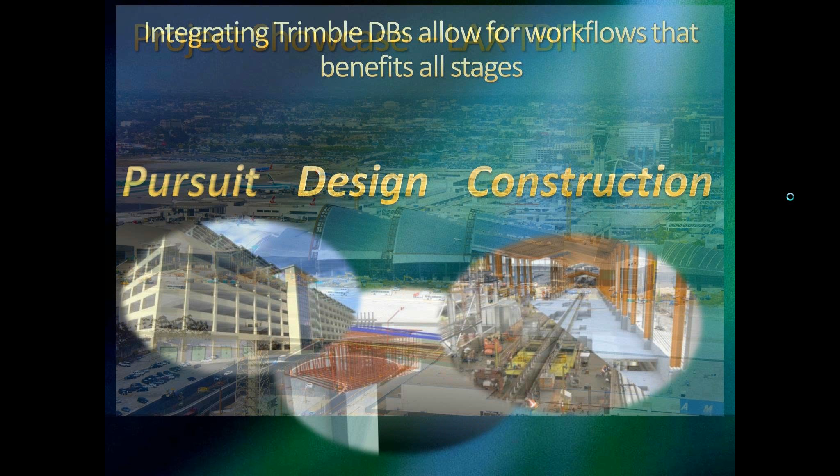So design, pursuit, design, and construction. We'll start off with the showcase project. This is the Los Angeles International Airport, and what you're looking at is the new Tom Bradley International Terminal.

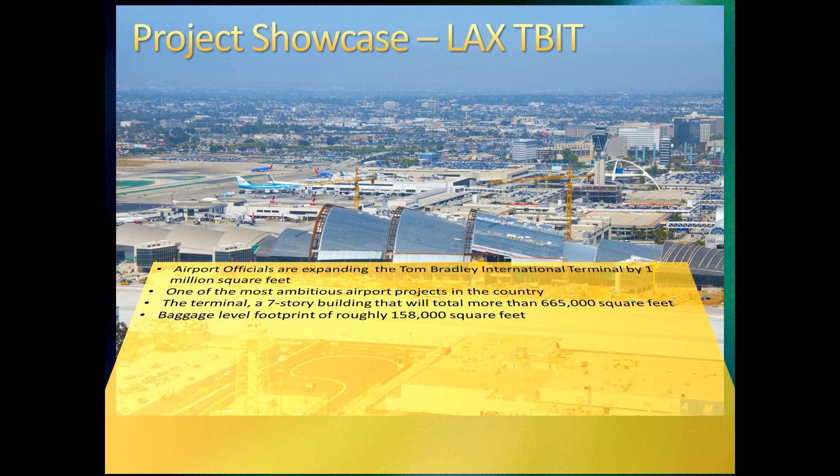Some statistics on the project: airport officials are expanding the Bradley by 1 million square feet. It's one of the most ambitious airport projects in the country. The terminal is a 7-story building with more than 665,000 square feet. It has a baggage level footprint of roughly 158,000 square feet. Architectural concrete towers nearly 90 feet tall, with 14 new airline gates capable of handling the next super jumbo jets, the Airbus 380 and the Boeing 787 Dreamliner.

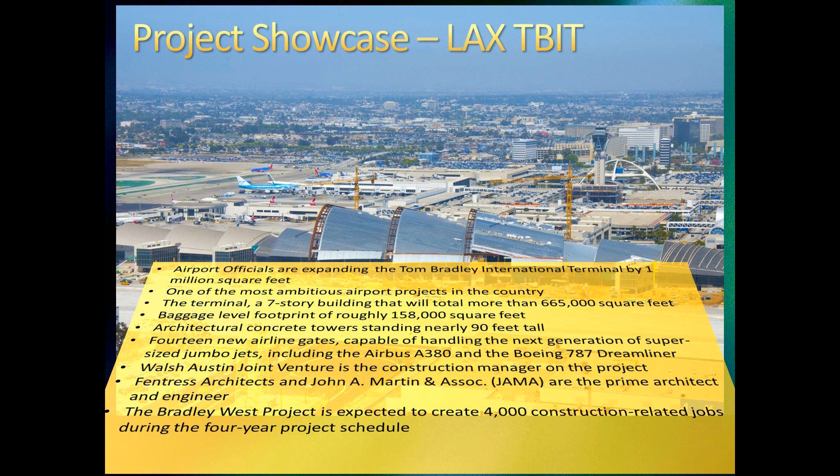Walsh Austin Joint Venture is the construction manager. Fentress Architects and John A. Martin are the prime architect and engineer. The project's expected to create at least 4,000 construction-related jobs during its 4-year project schedule, and I can tell you, I've been on site, and there's been over 900 craftsmen on site daily. Klorman, among other things, is the prime structural concrete contractor and one of the project BIM leaders.

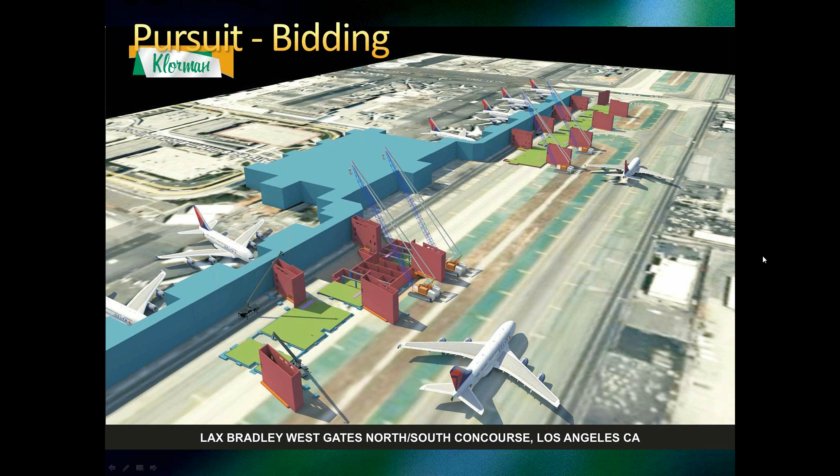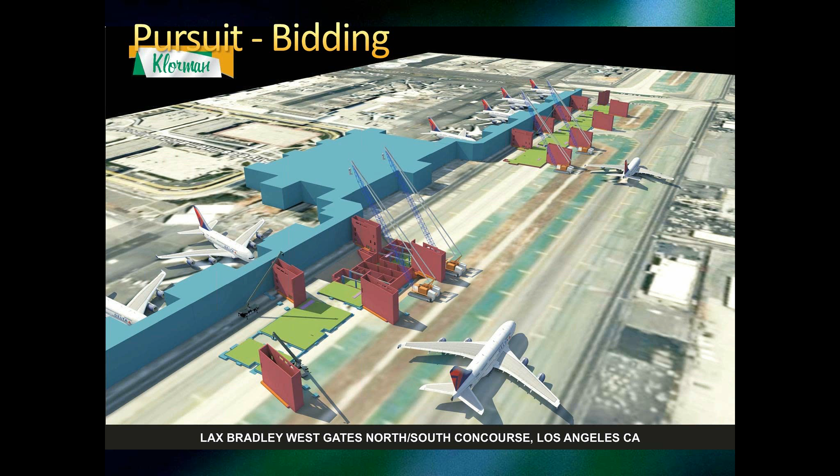So let's start off in the pursuit of the bidding phase of the project. When we found out about the project, we made a conscious decision that we're going to go after it. There were 8 other bidders for the concrete scope, and everybody was pre-qualified. The good news for us is that the competition was very capable of doing the project. The bad news for us is that the competition was very capable of doing the project, and it meant for us to be successful in a competitive bid process, we really needed to understand the building from the very get-go and look at all the opportunities we could find with our collective experience to take advantage and be the low bid on this project.

As you zoom in on this initial model, you can see we've got the existing Bradley modeled in. In this screenshot we're looking at logistics capabilities, where cranes are going to set, what relationships we have to existing structures, where we are on the runway, how close planes will eventually be crossing or nearing the construction activities. It gave us the ability to really start thinking about what we're going to do.

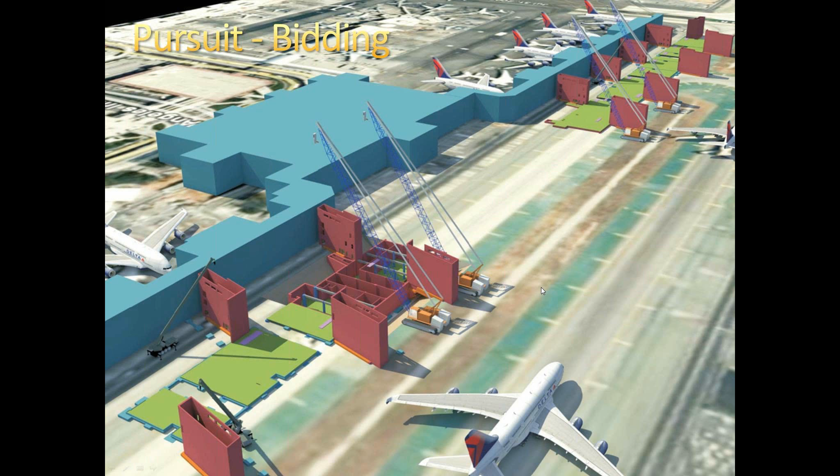Another advantage of the Tekla model is that we build on it and it increases the intelligence. Now these gates and these towers are architectural elements, so for us to really understand what's going on, we just increase the intelligence of the model.

You can see here we know all of the reveals or rustication strips to within a 64th of an inch. Our through-bolt tie layouts are already in, and the transfer of our panel layout is shown on the model. Here's something you don't see very often, but we do as a standard: all of our formwork to build these buildings is added into our model. So the intelligence of the model gets greater and greater and greater.

Now, it's not just the fact that we have this geometry or this representation of what we're looking at, but we're able to extract this information.

Because, for example, in our formwork we've modeled it into the building, we now, at the bidding phase, can extract exactly what it's going to take. Not only just a representation or part marks, but you can see here we actually have the bill of materials of what it's going to take at bid time, to know exactly what our costs are going to be and what our productivity rates can be.

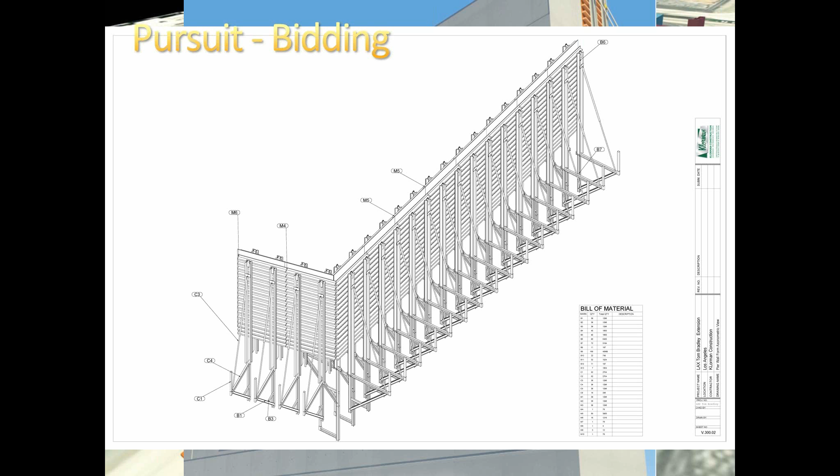It also gives us the ability to check our inventory, to see if that's something we're going to be able to provide out of our yard, if it's something we're going to need to rent, or if it's something we're going to use as an incentive to get the project. But again, all of this information -- when you're bidding projects of this size, you don't have months and months to study it. You have a couple weeks to put this project together and not make mistakes.

Another nice advantage of our approach with Trimble Technologies is that not only do we have the model in Tekla, but now we go into Vico Office and we're able to bring that model in. You can see here we have the model in the viewport, but we're now going into cost planning, and this is our cost planner module.

To some of you it may look just like an estimate. It actually is an estimate, but we use it for multiple purposes. One of the first things we use it for is construction caliber takeoffs. This gives us the ability to not only know gross areas, but to really understand the building in a location-based management.

You don't come out and build the building in one full piece. We know that horizontally we're going to divide the building into casting areas, and vertically we're going to divide the building into areas. So using Vico and the location-based management structure, it allows us to develop our cost plan based on that.

It also allows us to look at our various consumption rates, what formulas we want to use for our data quantity or our source quantities. If we're looking at hourly or lineal foot units of measure, we can roll everything up to look at common denominators.

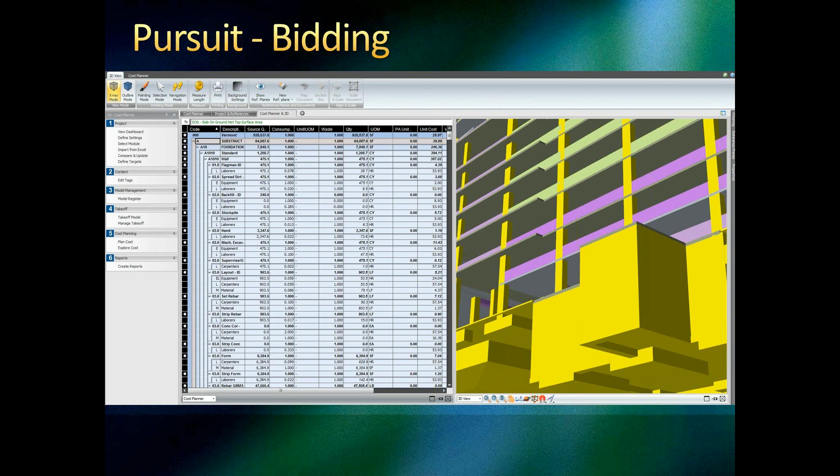Because again, at the bid phase, we're trying to look at all the different attributes from different angles, so that somebody on the team is going to spot something and say, wait a minute, looking at that from a lineal foot, or a cubic yard, or a man hour, it doesn't make sense, I think we can do better. And of course, that becomes the art of the estimate. It's not so much just the quantity survey, the mechanical approach, but that visceral, gut approach that the team really needs to be able to put together and draw from all of its resources.

Another advantage the Vico process gives us is what's called a flow line or line-of-balance schedule. Because we built the model in Tekla, brought it into Vico Office, and worked in our cost planning, our consumption rates and man hours are in there. We're now able to look at the project in a very unique fashion that lets us look for things.

For example, here, inefficiencies -- we'd like to see the lines in the schedule as close to vertical as can be done, and stacking. When we see big gaps, we already know that there's got to be some inefficiencies here. Maybe this crew needs to go faster, maybe these crews are going too fast.

Looks like we may have some interruption. When we drill down and look at this a little bit further, we actually find out that this task activity is rebar, and these are formwork lines - we want the start of formwork, rebar comes in, and the finishing of formwork. So it works out okay, but it allows us to really analyze what we want to do to make sure we can deliver the project predictably and controllably, but that we're not wasting money by letting the job extend too long - we'd incur additional general conditions for no reason.

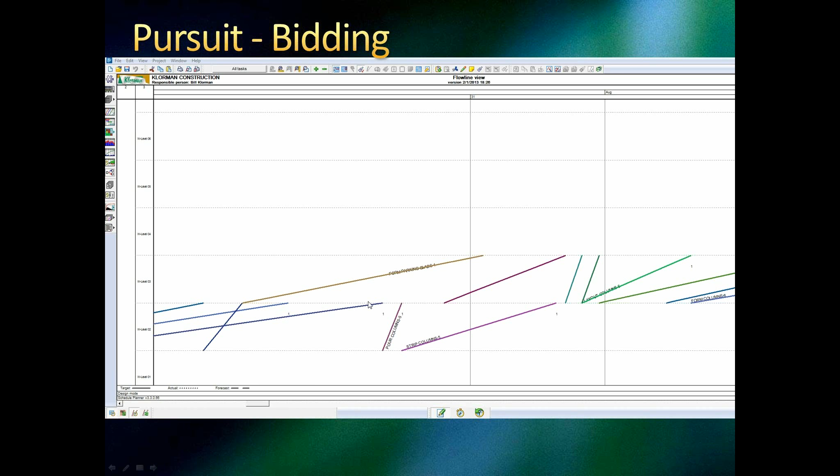It should make us uncompetitive. So another thing that we brought in from Trimble right away at the bid phase was Prolog Manager.

One of the things this project had was a very extensive good faith effort that had to be demonstrated with the bid, that we not only followed the procedures of good faith, but actually went out and did at minimum what was required and documented what we did in even greater fashion. So by using Prolog as our project management tool, we knew we could not only document it, but could show our ability for transparency during the bid phase and our ability to manage complex projects and tasks and report back on them consistently.

So by bringing in Tekla modeling, Vico Office, and Prolog Manager during the bid stage, we were actually determined to be the responsible low bidder, and we were awarded the project. That was quite a feat for us, especially considering the pre-qualified competition we were up against.

So now let's go ahead and move from the bidding phase into the construction phase, or building the project. Because we already started in the bidding phase with all of our technologies being brought in at different levels, we now just jump straight back into Prolog Manager as our project management solution. It's already started to be populated with the project through the bidding phase.

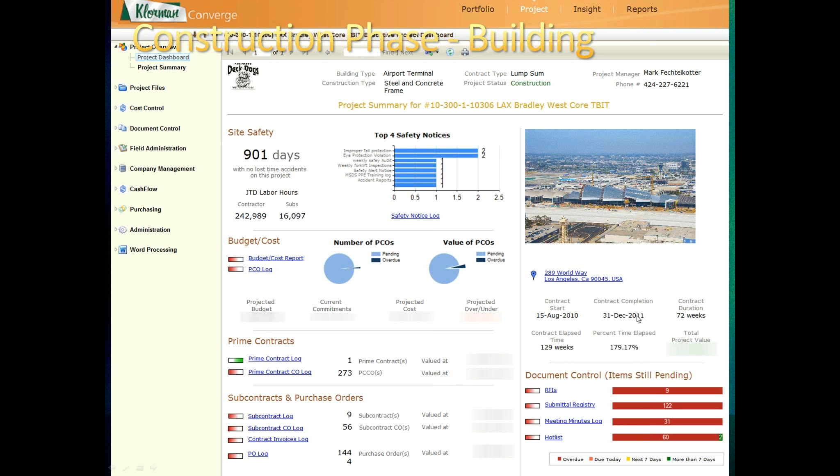In fact, I think we have north of 900 potential change orders submitted on the project. But great dashboard for me to be able to go in and look at what's going on in the project. And then, of course, I can drill down on everything.

Not only were we able to take advantage of internet-based solutions from a tablet or a computer, but now we were able to come in and look at an iPad solution. What you're looking at here is one of our superintendent's tablets or iPads, and I think this is a second generation. You can see what we have here is all the various checklists, daily details, work journals, events, the different group headings that they can drill into while they're on the site.

Now, what's so important to this, to our company, is this allows us to break the hold of an island. We look at the corporate office or the field office or a trailer as an island. And the problem with islands is when people are in an island, they're detached, right? Obviously, they don't see what's going on in the job. They don't have the ability to understand things in real time, current. They've got to wait for things to pop up or be reported to them.

So by fitting our superintendents and PEs and project managers with the iPad solution, we've statistically proven that we keep people out about 35% more time on the job site than they would have been without that. And that's just about 3 hours more of their day now spent walking the job, being involved in decisions real time, as opposed to being stuck in an island and detached from the action.

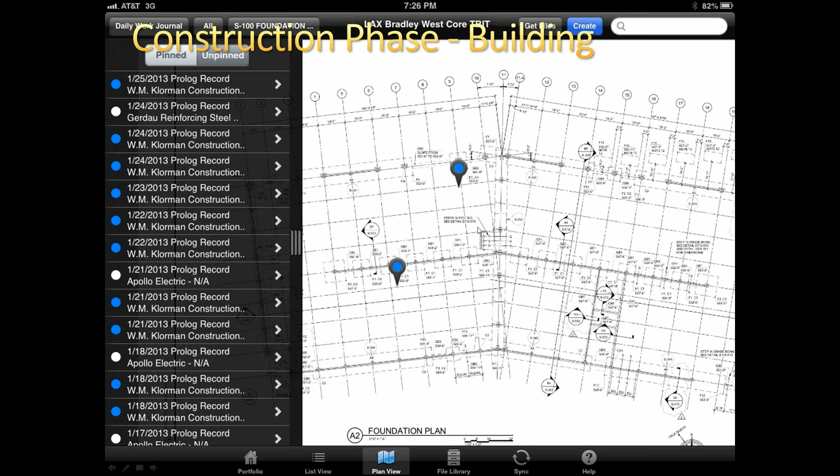So moving a little bit farther forward, not only can we look at this in a list view, which you're looking at here, but we can go ahead and look at it in a plan view. Now this is very powerful as you're walking through the job to be able to look at something that's happened, find it on the job site, on the plan, and understand what it is that took place, where it was, and this information works both ways. It uploads and anybody else can see it. It's not limited to just one user.

But we can now go into the cost planner. We can look at variances. We're able to look at productivity rates, where things have changed, where we thought maybe we could do something at, say, a 0.013 consumption rate, and they actually ended up changing to a greater rate. We have all of that information to be able to go back, not only analyze where we've come from, but where we're going to and what impacts that's going to have in the project towards completion.

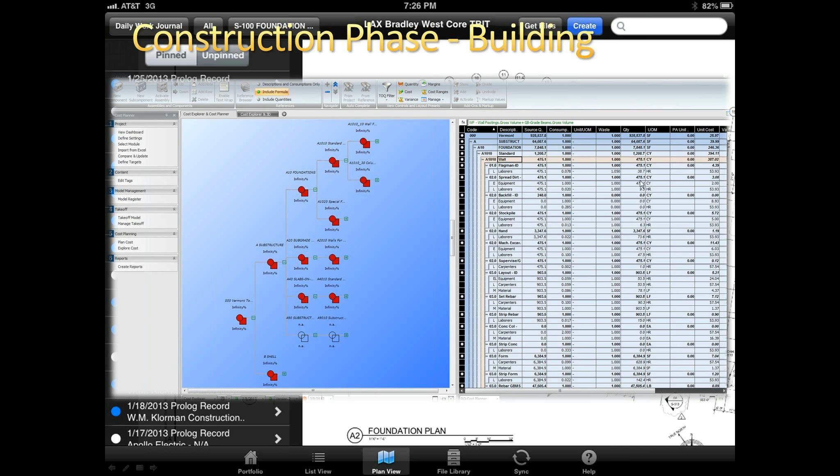Another very important tool is leveraging integration between dissimilar databases. What you're looking at here is the Tekla model in the background, and here you're looking at our workflow manager that takes information from the BIM and imports it directly into our project management software.

Here we're dealing with RFIs, and this particular RFI 151, what we've been able to establish is when we make a change in the model—and I should back up and tell you that we use the model as our central repository. Everything that happens in the project is recorded in the model, whether it's a bulletin or an RFI. We have hyperlinks to specifications, to PDF files that have photographs, statistical information, mix designs, testing reports—all of the data, repairs, anything that's happened, surface finishes, all of that information is captured in our model.

And then from the model, we're able to trigger notifications to the different software platforms that we're running on the project. So in this case, a VDC engineer has gone in, made a change in the model. He's created an RFI for verification. It's linked and connected to our project management solution.

And now a greater action happens. Not only is it recorded and captured, but an automatic potential change order is created, a notice of change is automatically created, and an email blast is sent out to the project team members, whether you're an engineer, a superintendent, a project manager, a QC manager, or an executive on the project. Everybody is now aware that this has happened. So there's no secrets, there's nothing that gets dropped where nobody told somebody about it.

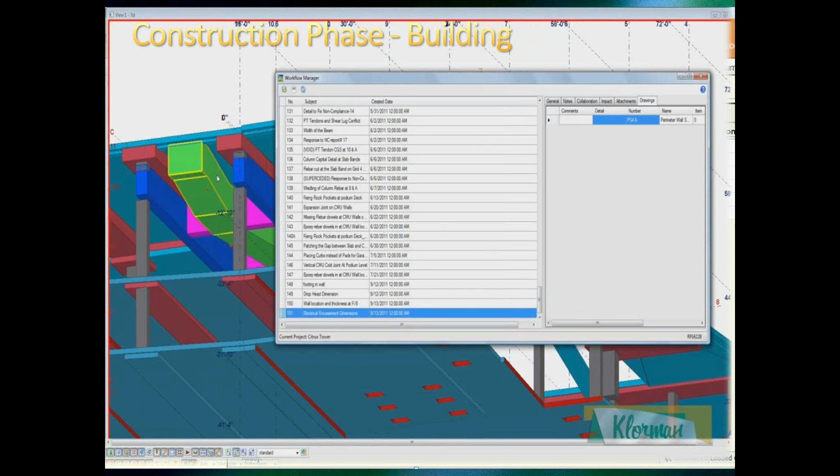And as we go through our different disciplines, if you're an engineer with certain tasks you're doing, or you're a project manager, when you go to your open RFIs or you go to a meeting, all of this is here so that whatever your discipline is on the team, you can do your work. So what we've done is take out a number of steps for people doing repetitive work, and we've been able to integrate the databases so you do it once and everybody involved gets the benefit of it.

Other examples of the advantages of having integrated information and being able to grab that information on the fly. This is an actual exhibit. There was some change orders on the job that dealt with time for basement wall construction. Literally in 3 minutes we were able to produce this document. What you're looking at is a plan view of the core.

These are the basement walls. Every colored segment you're looking at is approximately a 60-foot section of the basement wall. You see the various areas, and you see a lot of little things around that.

What those are, if we zoom in, are actually every single RFI that affected each individual section of the wall. And we're able to track this. So if you can imagine being in our position, there's a question about an impact related to RFIs, and we don't really think that the extension of time you're looking for is meritorious.

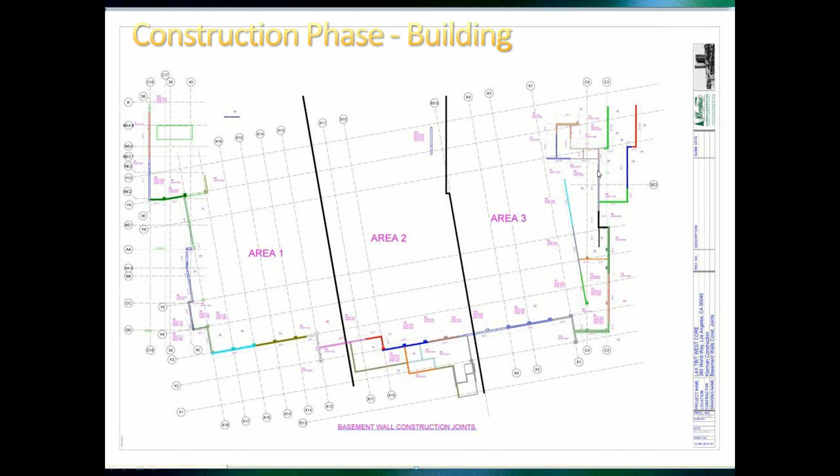We can literally hit a button, extract this drawing, walk into a meeting in 5 minutes and say, here's exactly where this impact is. And if we just back up for a second, now all of a sudden this drawing has a lot of meaning. When you look around, with the exception of one 60-foot wall, which ultimately didn't have a change, an RFI, you can see the magnitude of clarifications and RFIs and changes in the work that affected all of this area.

So a huge change management tool, a huge communication capability, and again, real time, on the fly, being able to know where you are and what's happening on the project.

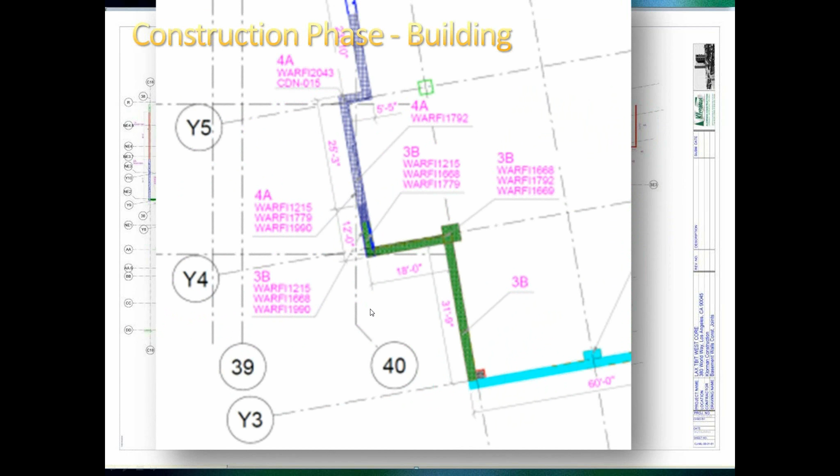Look at some more construction technology that we used on the project. What you're looking at here is Trimble's Nomad. This is an LM80 handheld computer, and this is what talks to our robotic total station for all of our layout and tolerance control. I don't know if a lot of you have ever seen this in action, so I'll show you a little bit about it.

As technologies advance, we recently purchased a newer technology that does similar things but more, called a Field Link. It's now more of a tablet-size computer and has better resolution. It's 3D, and gives us the ability, through what's known as Trimble Vision, to actually see the photograph of what the robotic total station is looking at in real time, with an overlay of the control and layout.

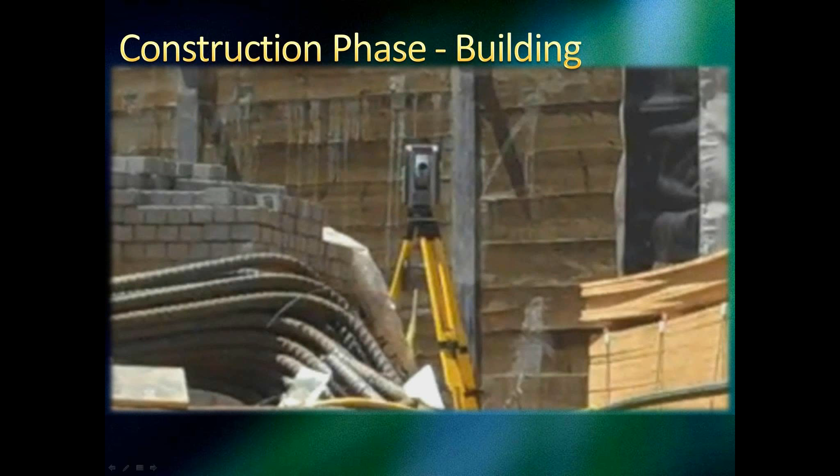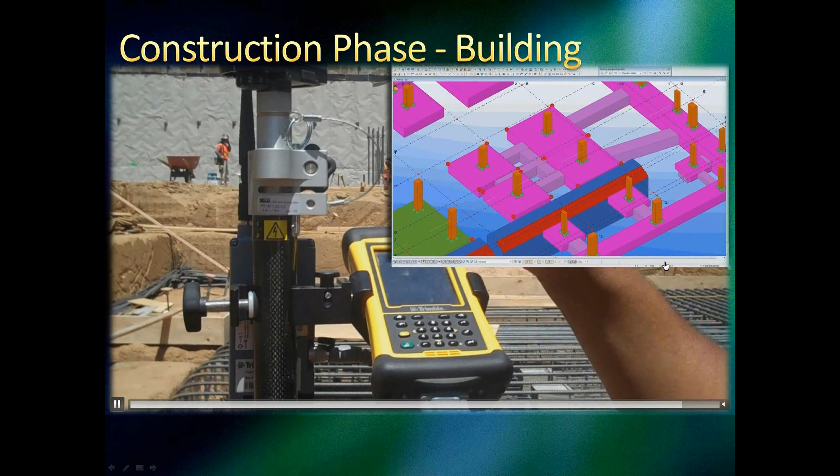But let me show you how this works. What you're looking at now is a layout carpenter talking to that robotic station. You can see the robotic station waving to us. Using our Tekla model, we create our control points or layout points of what needs to be laid out on the job. That information is then transferred to this LM80.

Another thing you should be aware of for efficiency: this LM80 has the ability to have Wi-Fi. So we've set up the Nomad with an email account. When a change comes in on the documents and the engineer updates the model, on the fly, in real time, that updated layout is emailed to this handheld instrument, updated, and the field is as up-to-date as anybody else in the whole project. That's a huge real-time benefit.

Another big advantage of going to robotic stations is the reduction in labor cost and time. What we used to do this layout with 2 to 4 people, we're now able to do with 1 to 2 people. Literally cut our cost of layout in half, a 50% reduction in cost. On a typical project, layout for our organization usually runs in the area of about $175,000 to $250,000, and you've now cut that by about $100,000. That's a very big dollar amount to either use to your advantage to be competitive or to increase your margin on a project.

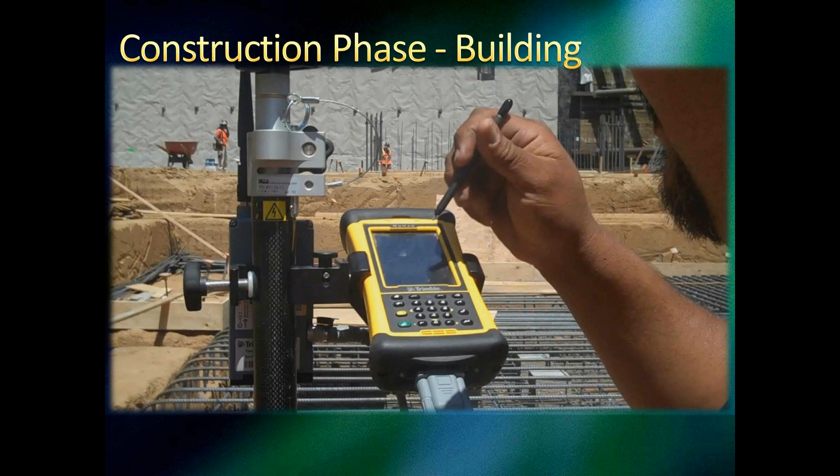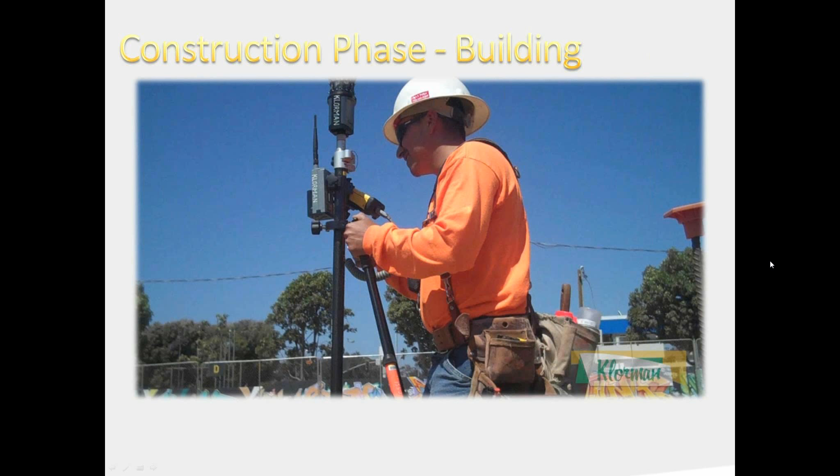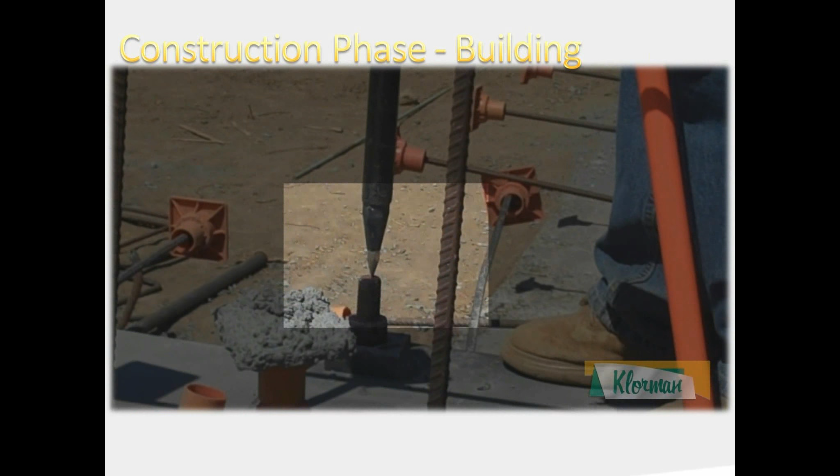Another great advantage of what we're able to do is what's called direct reads. I think this is one of the most important advantages to increase the quality of buildings and reduce unnecessary expenses. What I'm going to show you here is the ability to as-built the structure. What you see here is a field engineer with the prism connected to the robotic total station. We just poured that foundation yesterday, and he's setting up over this large embed that has to be right on the money. He's going to shoot the coordinates of that anchor bolt so we know exactly where it is in XYZ coordinates, and as soon as he plumbs up over this, he's going to hit send.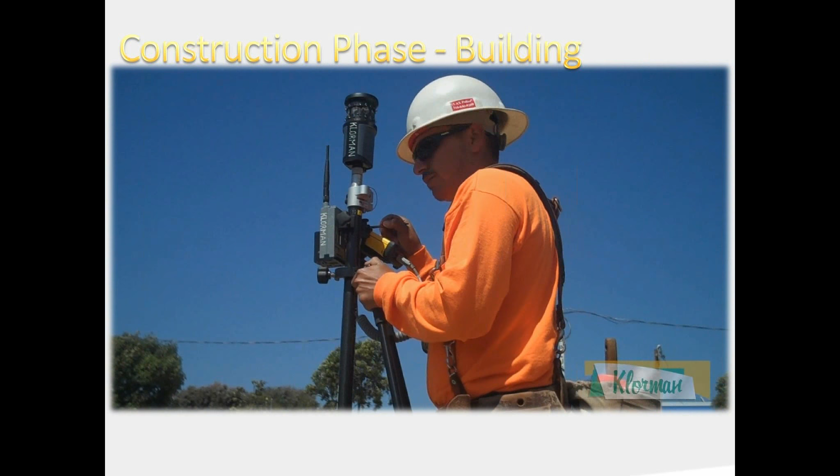Now that's given us the ability to instantly produce a tolerance report. This fit-up tolerance report is extremely important because not only do we know where it is, we know what the design tolerances were per our contract obligations, before and after pours, and if we're okay or not okay. Okay is great, but what's more important to our organization is the not-okays. Look at how much money is spent and how much delay is added to projects because of fit-up problems, where a follow-up trade doesn't find out about a problem on the job until it's out there doing the work.

From a corporate standpoint, we used to carry about a $500,000 annual budget for fit-up problems, for errors and tolerances that weren't accounted for or corrected. Today, because of this technology advancement, we carry about $80,000 annually for it. So a huge savings in our cost of doing business.

The other thing is these change orders, in this case the structural steel, he normally wouldn't find out about until a couple months down the road. He comes out, his survey crew shoots, and says, oh, you have a problem. We've already manufactured our base plates, they're already welded to the vertical elements, and it's going to cost you $10,000 a location to cut these off and re-weld them.

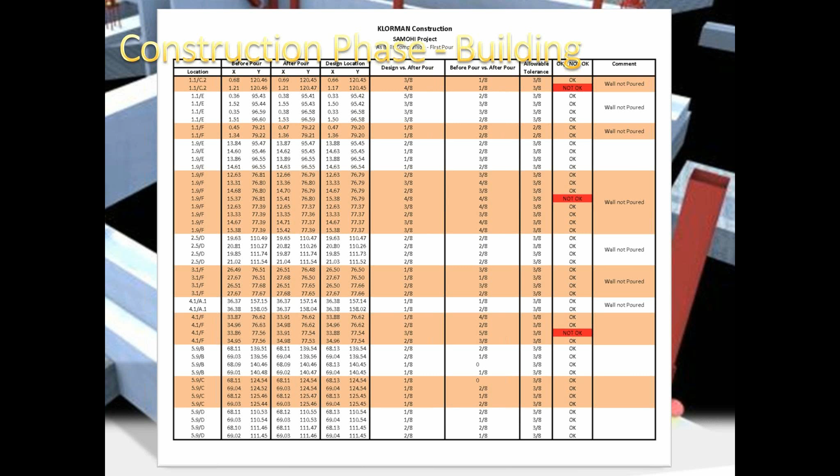All of these things are proactive instead of reactive. And again, it's all because of the ability to take the technology we're employing on these projects, integrate the various databases, and reap the real-time advantages of that.

Staying with tolerance control, this is one of those 90-plus foot tall architectural walls we looked at in the bid phase. What you're looking at here are all of the embeds for the welded or bolted connections for the structural steel frame to attach to this, at this point in time, freestanding 90-plus foot tall wall.

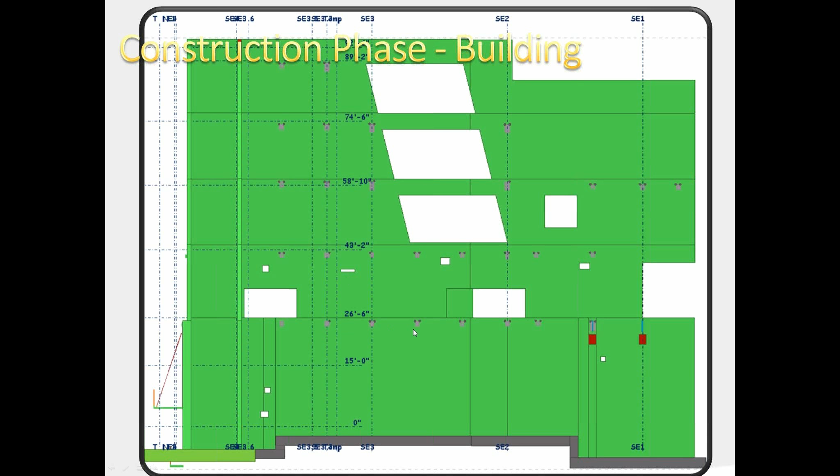Not only are we able to use this for layout of our embeds when constructing the wall, but from a tolerance report, after the lifts are done, we go out and shoot those, and we know exactly where each embed, bolt, or ledger item is in place, and whether we have a problem or not. We can catch that at each pour. We don't have to wait until the entire wall is done.

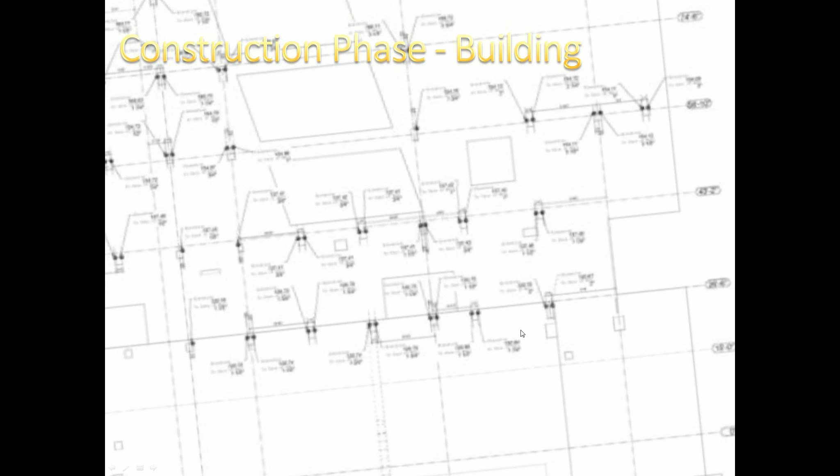Same thing we were able to do for all the structural steel floors. We've got the before-pour survey and the after-pour survey, so we know what deflections have happened, what the tolerance controls are, and the quality of our floors. In addition to doing F-numbers, we have the ability to go back and really understand the performance of the building as it's loaded and as work comes on.

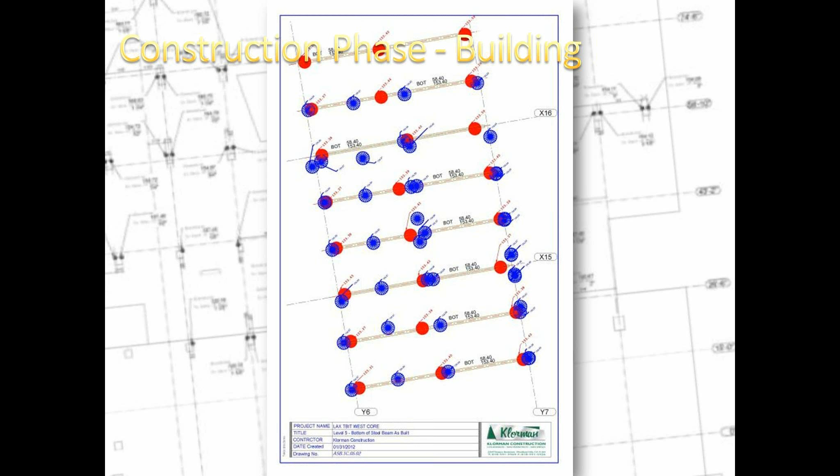It's retrievable, it's interoperable. We can use this in a model view, in a plan view, and in tolerance reports.

But again, we knew about it because of the technology. Had there been an issue, we would have been able to address it now rather than later in the finished trades, which would have been very costly and time-consuming.

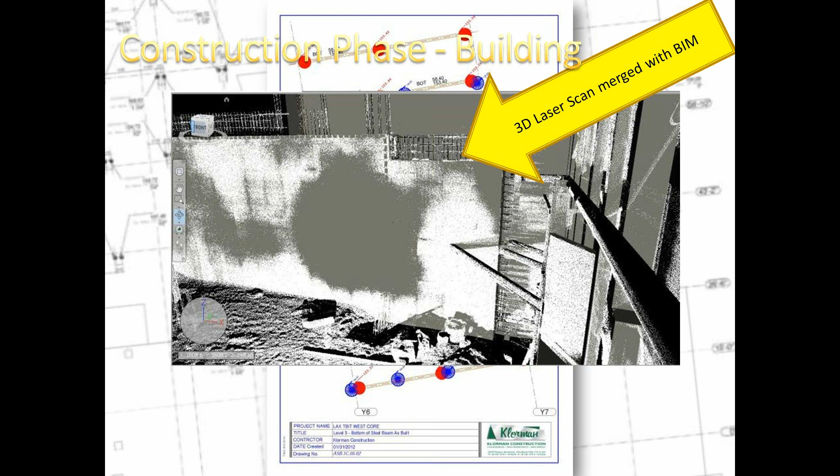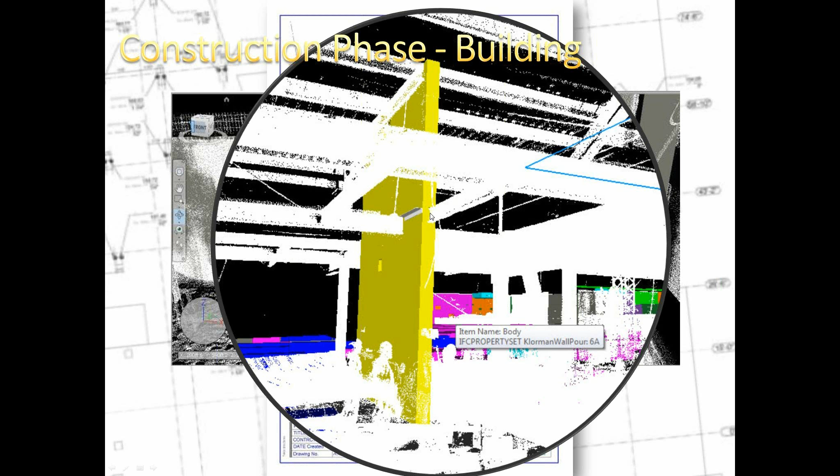Another very important thing we were able to capture from the laser scanning happened during the foundation phase, when the owner directed the structural steel contractor to go past the concrete work. So they erected all of this structural steel, but we had this multi-story shear wall that needed to come in to tie all the steel together and get the diaphragm back in. By taking the 3D laser scan and moving it into our BIM model, we found out the structural steel was actually in the wrong spot by about 2 inches, which meant the wall was going to engage differently into the connection than anticipated.

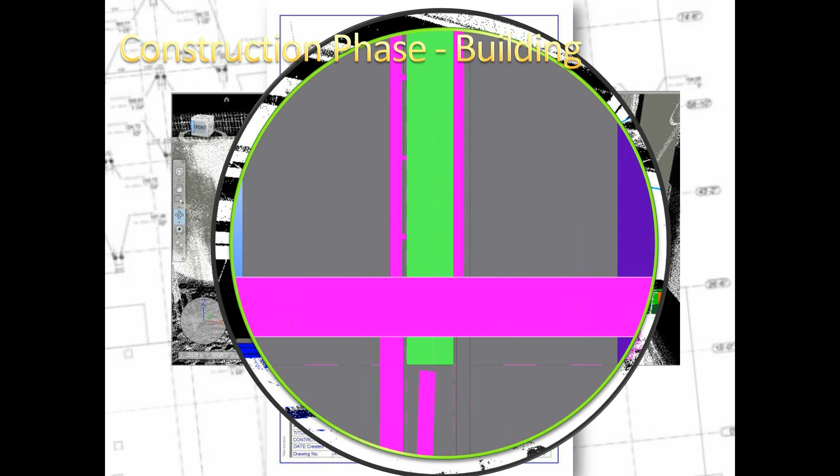Because we captured this early in the project, we were able to save a very large change order—we only had a smaller one to deal with the issue. From this information, we went back to our project management solution, created an RFI, captured the scanned information, and let the design professionals, owner, and construction manager understand what was involved. Foundations had already been poured, so we had some limitations, but we were able to collectively work together on a solution that resolved this with the least interruption to time and cost.

Staying with taking advantage and moving that technology along, I want to show you how we were able to take the information from the model, which we consider anatomically correct. That means they're built to the exact tolerances that we expect to build the building at. Because of that degree of accuracy, we're able to extract all of our formwork information, rebar fabrication and erection information, and I want to show you a little of that right now.

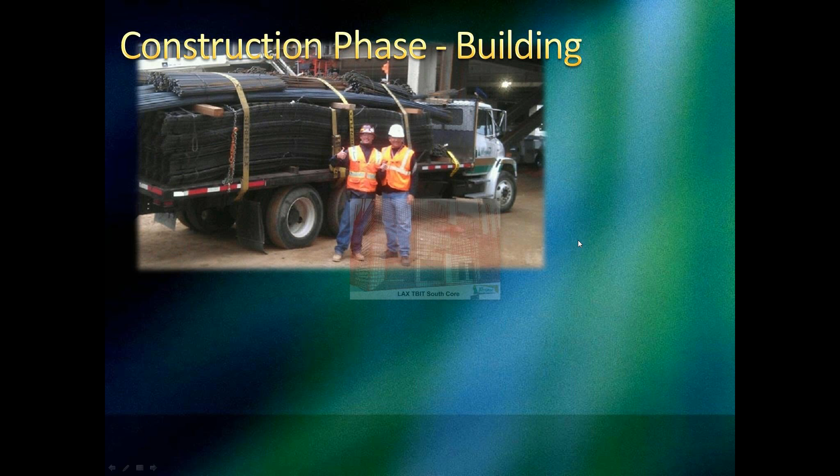This is one of the cores, the south core, and what you're looking at right now is a first or second lift of the core. But I want you to see how every piece of rebar is drawn exact. You can see our right angle bars are in. You can see our add bars. You can see our exact lap splice that's in. You can see how these bars are going to develop past the openings, our larger bars, our jam bar conditions.

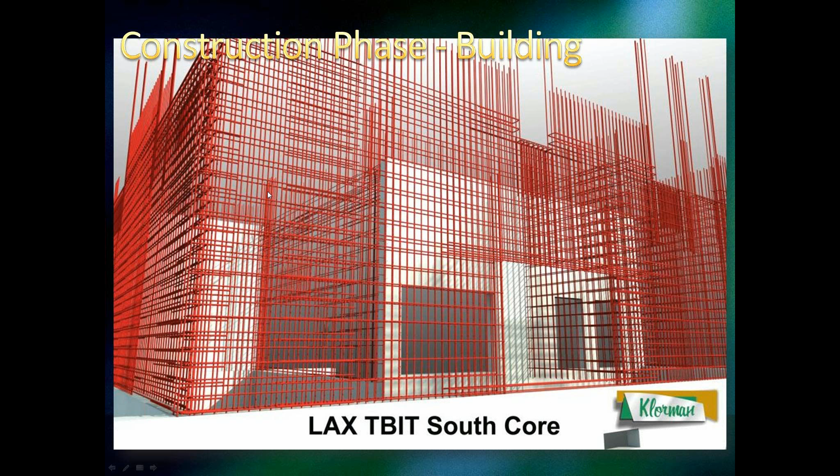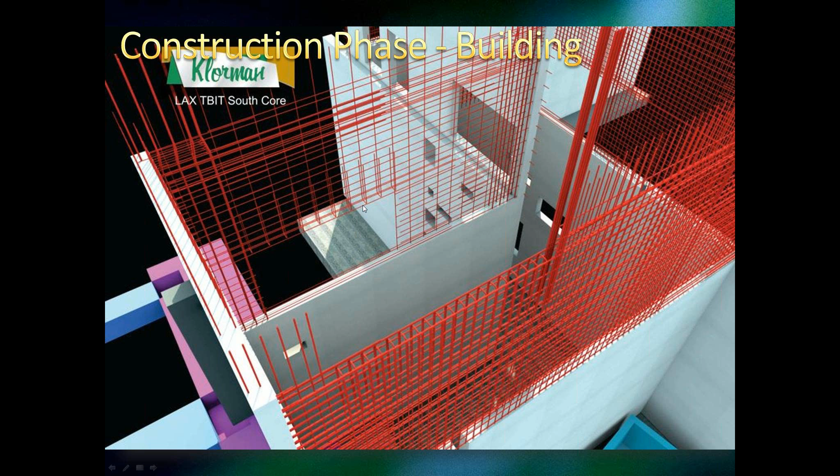If we look at it from a higher view, you can see exactly where the bars are going to dogleg. You can see our graduated ties. Now this is exactly to the piece design and fabrication information. This isn't a hypothetical, this isn't a representation. This is exactly per the piece what it's going to take to build this building. Our individual U-ties, again add bars, lap splices, congestion issues, everything that it's going to take for us to be able to do this building.

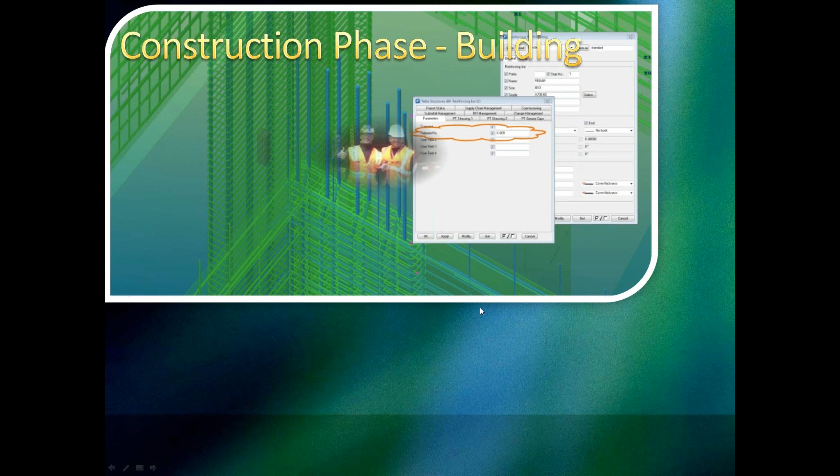Because it's in the model, we can control our releases. How many pieces, what pieces, if it's been released, if it hasn't been released to the shop for fabrication, if it's gone to submittal for shop drawings. But every single piece is known and understood in the model.

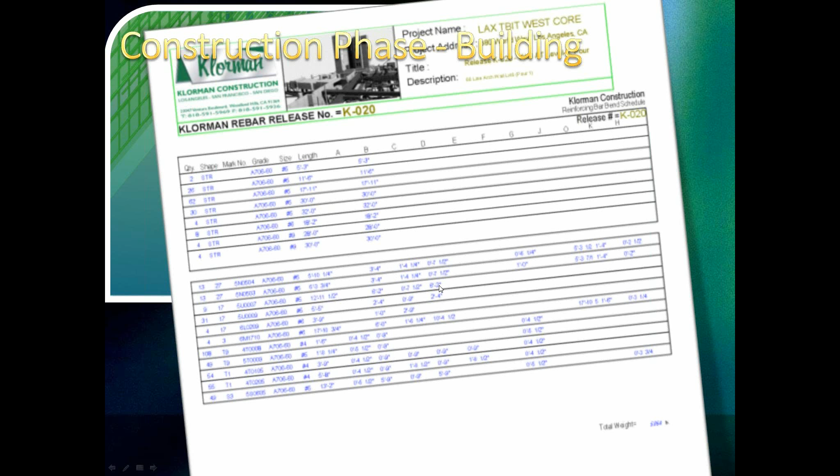Then it's extracted. Here you're looking at our release number 20 on this project. We know exactly what the quantities are, the grades of steel, the lengths, the bend types, what the lengths of those separate bends are, if there's any special understanding of the bend types that we need the fabrication yard to understand. Our placing drawings, our shop drawings are pulled directly from that.

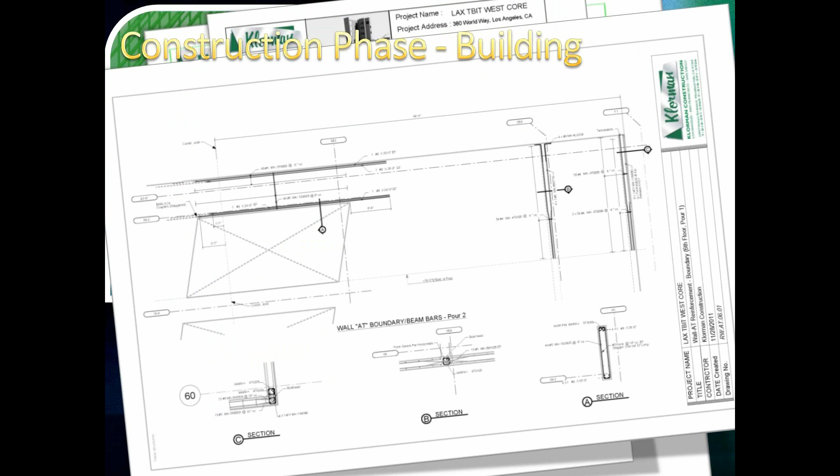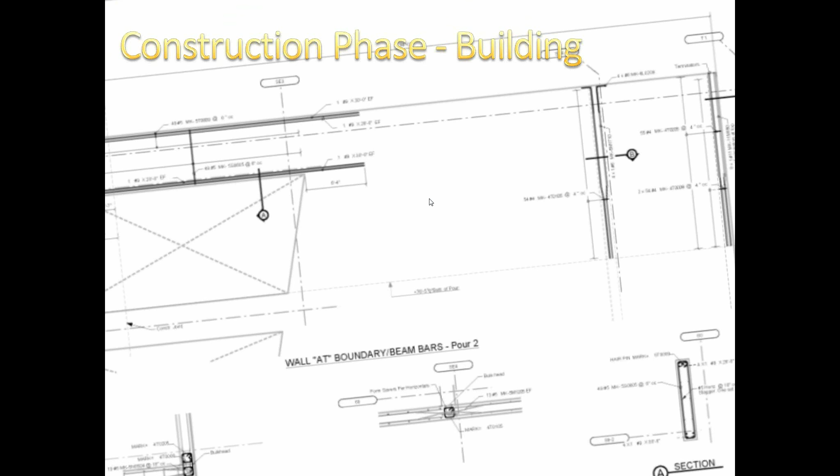Now one of the nice things, not only the level of quality and detail that we have in these fabrication drawings and shop drawings, but should anything change in the model, these drawings are immediately changed. So everything's at real time, everything's up to date constantly. And again, we produce all of our placing drawings and our shop drawings for review.

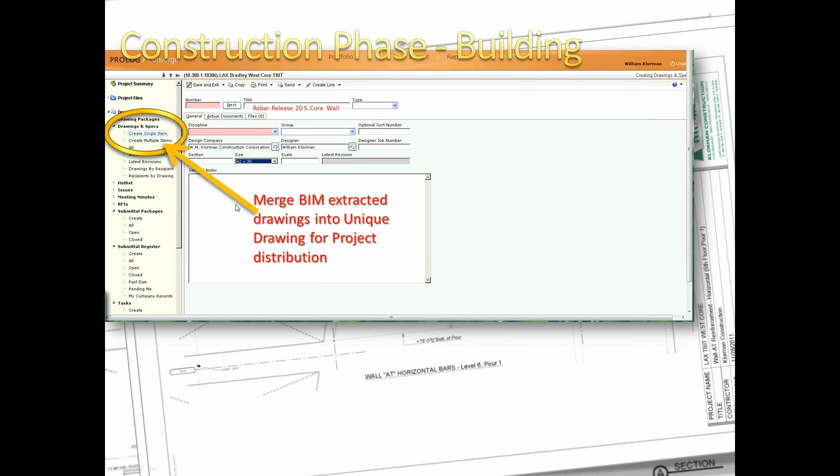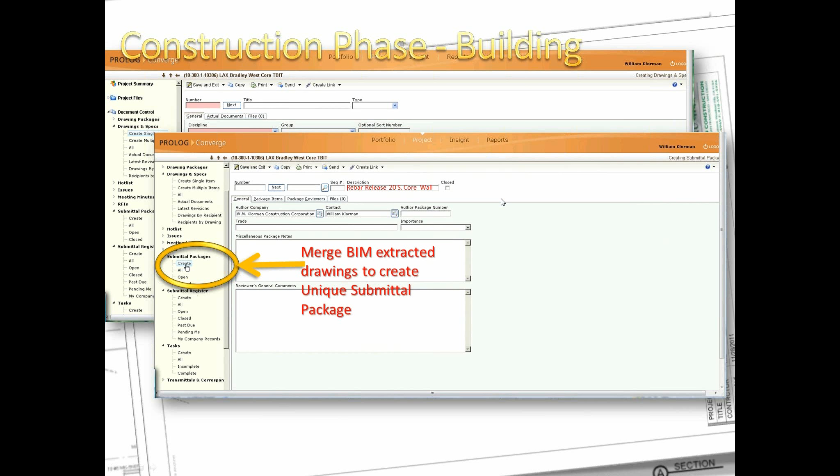Then we round trip again, going to Converge through our web-based solution. We create our drawings. We merge those into the project record that we're going to have. And we also are able now to create our submittal package because that release drawing now exists in our drawing list. We can go ahead and create the submittal on the fly from a unique package, go ahead and send it in for submittal and approval.

Now once the process is completed and the shop drawings have been approved, we now just send that information to our fab shop and you can see all the fabrication that takes place. Ultimately that stock is delivered to the job site, installed, and again, not only do we have the advantages of taking the model and cutting down on our internal workflow process.

That's a big thing that people tend to overlook, the advantages of internal workflows. Instead of having multiple draftsmen doing things with AutoCAD or with paper and having to rechange those layers and discontinuous or lack of continuity between other parts of the operation, all of this is integrated so our internal workflow is cheaper and more predictable and controllable, and our field has produced better.

We found that our savings in the field will run from 3 to 7 to 10% reduction in cost because of the productivity. You noticed in the shop drawings that I was showing you in that modeling, we don't just model it by a book. We model it the way our field crews are going to install it. So if our crews would rather have dogleg bars instead of right angles, that's how it's been designed. So we look at the most optimum efficiency of the installation approach when we're modeling this steel so that when it gets out to the field, it's at its most optimum field installation. Same thing with our formwork drawings.

I'm not going to take the time to show you all the different formwork drawings, but I showed you one earlier. Same thing - we're able to part mark and package all of our fabrication drawings for all of our formwork. It's fabricated in our Fontana facilities, trucked to the job in packages, and now we've saved the time of people trying to think and do layout on the field, where now they're assembling an erector set. Part A goes to part B, and they're able to do what they do best - build things - rather than trying to take the time to figure out how false work should be designed.

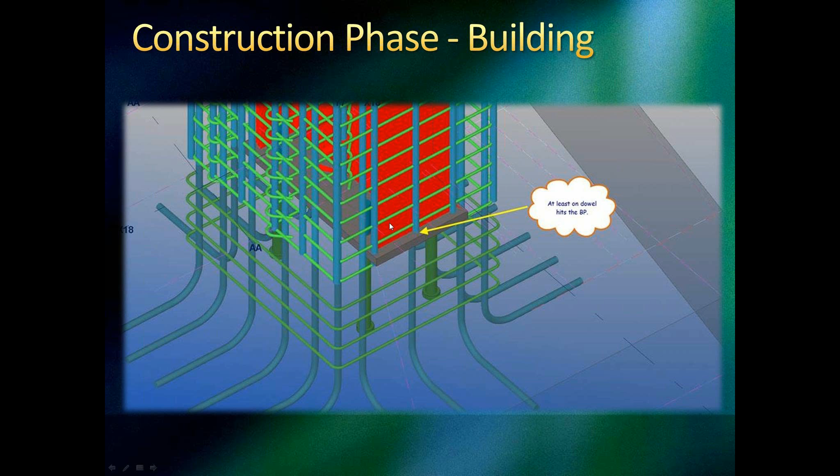Not only did we have these type of problems that were visualized, now we had a problem at the top of these basement walls because the horizontal steel that needed to come into the project would have interrupted all of these ties, would have affected how these right angle hooks were designed to go through the building to tie into other elements. So all of a sudden we had this huge amount of elements that didn't work together.

Under normal construction practices or procedures that are followed today, through the time frame of creating RFIs, if this even would have been seen, all of these cages would have been on the job, the foundations would have been poured, we would have had to go back and argue with other people on the job who was going to pay to rebuild these cages, the crane time, the crew time, the stand around time, all of that, and then the cutting and manipulation. It just would have been a mess. This happened, I think, 80 times on the project.

So again, by modeling it, by looking at updating the model in real time and confederating our models with other discipline work, we were able to save a huge amount of money and time on the project.

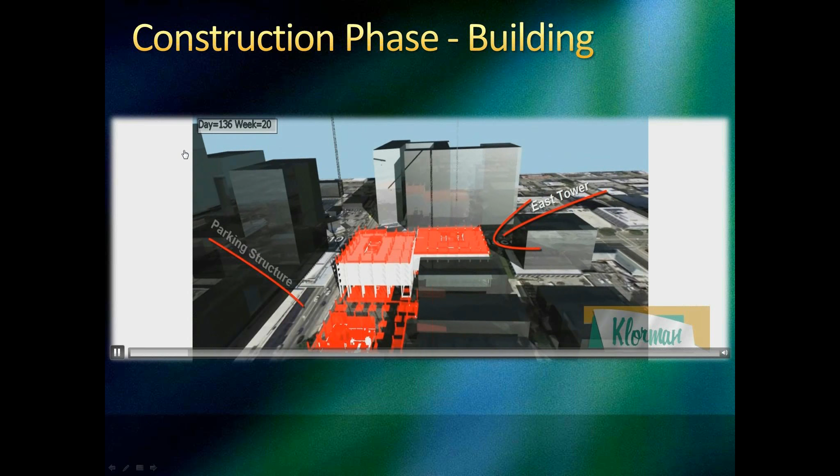This is a good example of 4D validations or simulations. What you're looking at here initially is a big picture. You've got the environment around the project. You can see the different towers under construction, and you can see that it's tied to a duration of days and weeks, so you can vet out the different things happening on the project.

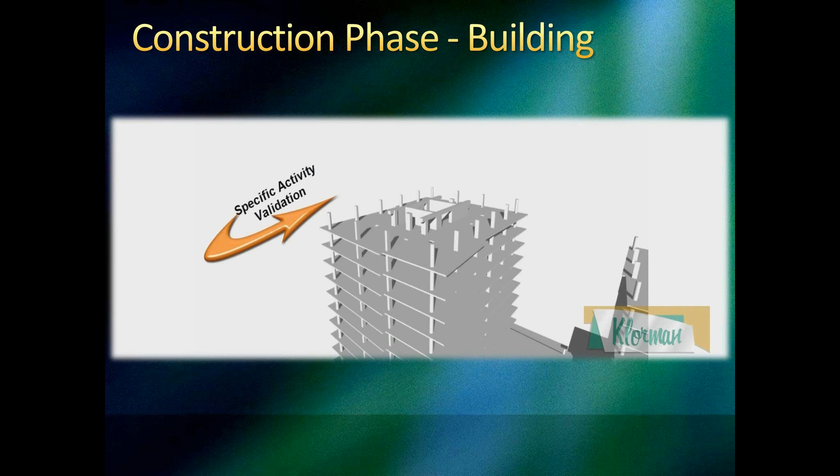That's great for orientation, coordination, and general verifications. But what's really important, besides just seeing this thing, is being able to go in and validate very specific activities. Here we're going to show you a specific formwork we developed, a climbing form system for this particular core. We had to prove that everything was understood and that we could cycle this in a week. You can see here the column forms are flying into the process. The columns are poured.

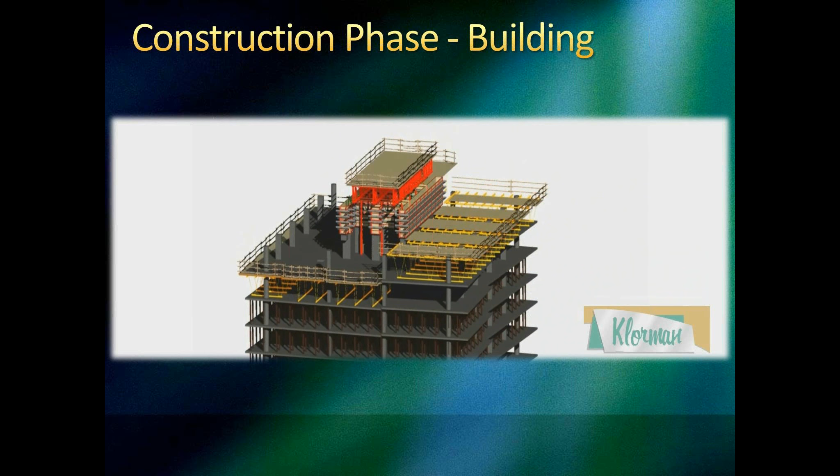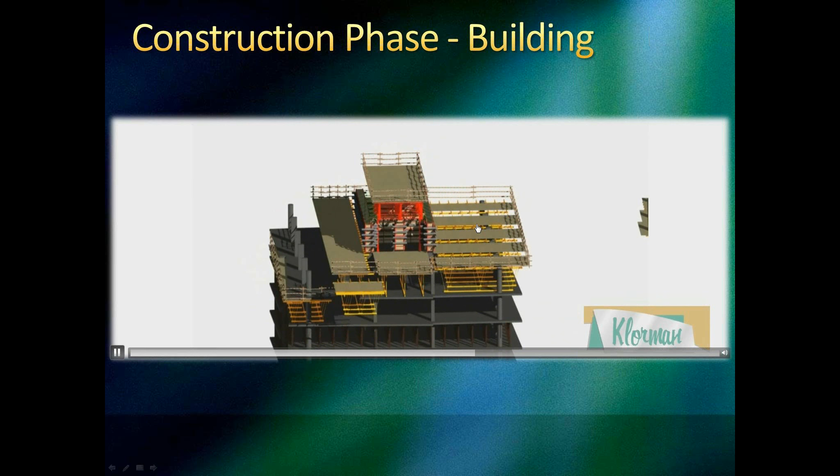You'll notice that the plywood is short of the edges. That's because it's anatomically correct. You notice we have these areas left out - we couldn't move these deck tables around these columns if they were full pieces. So if you're a formwork carpenter, a GF, a superintendent, or a QC person, you see that they need to come back and do these infills, and the forms are designed to take that infill process.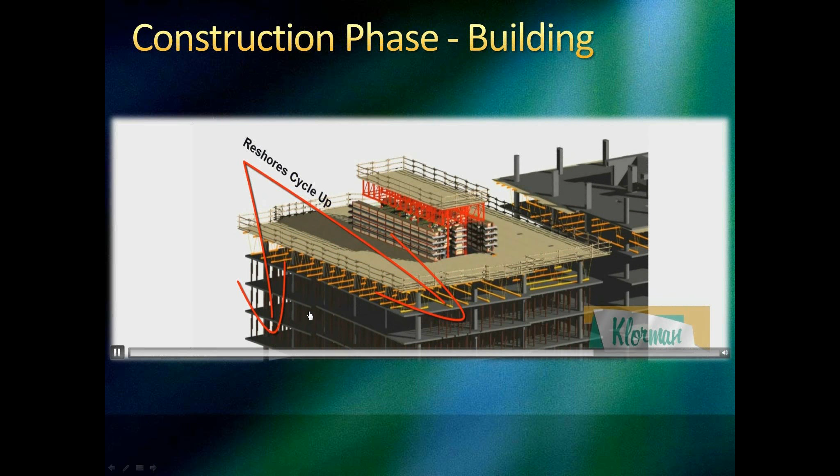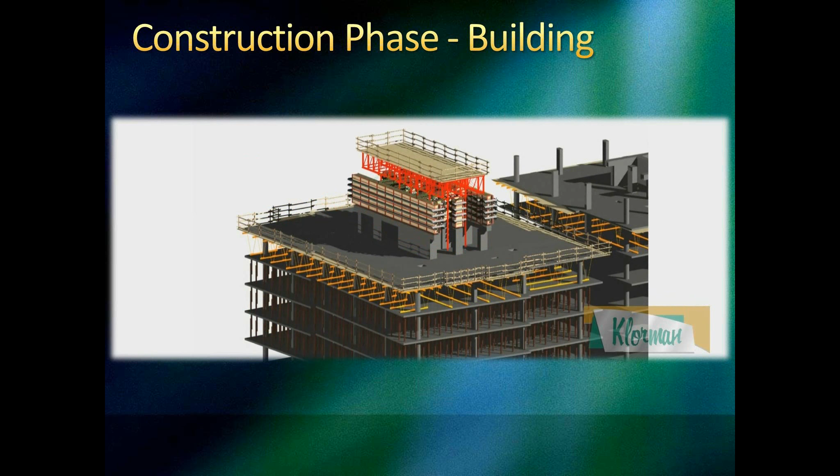As we spin through the model a little farther, you'll see that as the tables are finishing up, the handset crews start coming in and filling in and buttoning up these decks. As they're buttoning up, the table crew moves down to take the reshores, moving all of these reshores up through the building ready to pour concrete. We pour the slab monolithically with the core walls, and we've now validated that all of the activities and components necessary to complete that task in the time frame we're anticipating is doable, and we haven't overlooked anything.

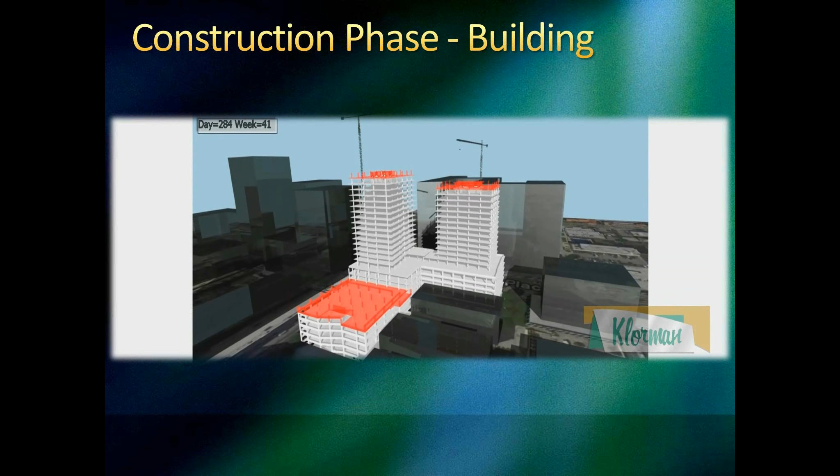And of course, because it's in the model, we have the ability to extract the formwork drawings, the consumption and productivity rates, the bill of materials - everything we need for our work sequences, our utilization, safety, and orientation. So 4D programming validations, again, because of having the model, having Vico, having our project management solution, having our tolerance information - all of that works together to produce that integration.

Let's go ahead and look at some of the returns on investment. Because of the technology we use, Trimble technology, we consider it an accelerator. What I mean by that is the technology doesn't do our job for us, but it allows us to accelerate what we do best in building, analyzing, and studying a project, and being able to take the vast amounts of knowledge we have throughout our field crews - whether you're a laborer, a carpenter, a general foreman, an iron worker, a cement mason, a pipe fitter, a superintendent, quality control people, testing people - all of that collective information, and accelerate that through this technology.

Because of Trimble specifically on the LAX project, it resulted in Klorman being awarded a truly landmark project. It resulted in Klorman being able to manage and construct a landmark project to a successful and very important, profitable completion, and it increased our ability to win more projects. Not only did we win this project, but because of the gains and strides we've made on the LAX project and our technology, we've been able to implement this on many more projects since this project first started over three years ago.

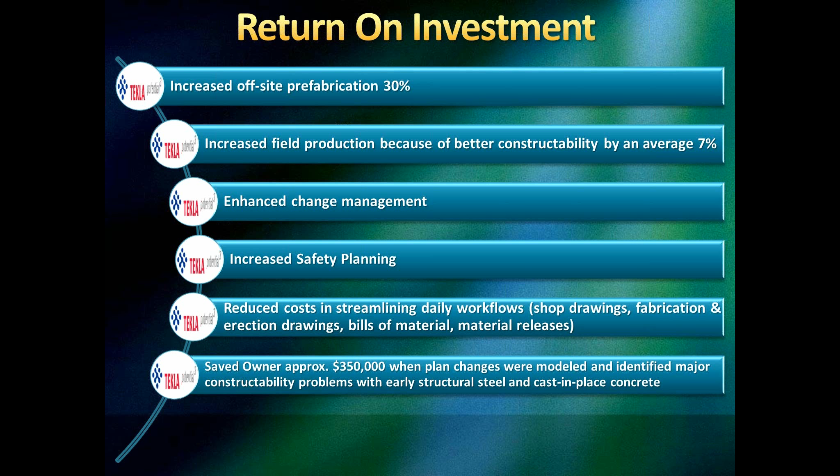It saved our owner what we have attributed to about $350,000 in plan changes with early detection. I showed you that cast-in-place column and steel column problem that was found.

The BIMs created a reusable database. Now that's really important, because as the model grows intelligence, it's not just geometry - it's geometric representations that are linked to various information that can be used and leveraged repeatedly for different requirements, whether it's at the end of the job in a handover situation, during the course of the project for change management, for coordination purposes, conflict resolution, constructability, understanding, sequencing, logistics. You keep going back to this well, this repository of information, and you keep increasing its knowledge.

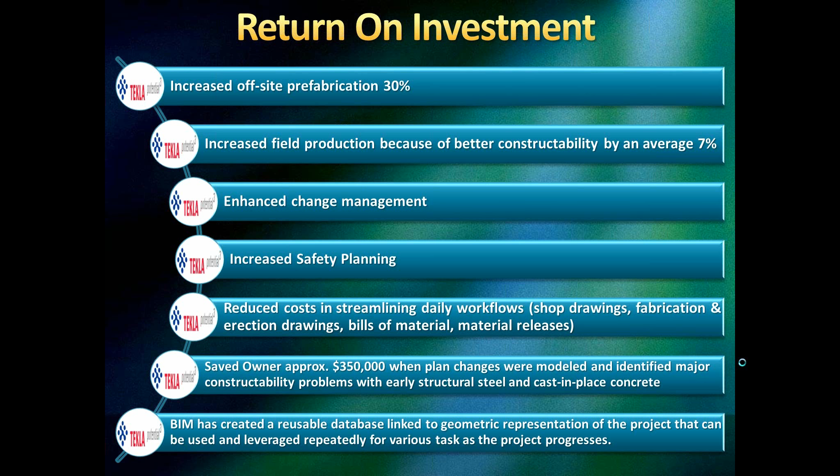Looking again at a granular level with Vico, by creating those construction caliber quantities based on location, it's helped our estimating and our project team do better estimates and reuse. Reuse is a very important thing. As a concrete contractor, we have to be the epitome of process and reuse.

Unlike a steel contractor where you can balloon frame things, we have to build things so that the material we use to cast the first pour can be reused for the third pour. The second pour goes to the fourth pour, and on and on. So by being able to increase our reuse through efficiencies we found in Vico, it has increased our overall accuracy and performance by 3%. It's reduced our time of estimates by about 8 man-hours per estimate.

Now this is a little misleading. I'm specifically talking about every change on this job. When you look at these PCOs on this job, when we have 900 potential change orders on a project, these aren't just change orders where you can throw out a number. There's a large bureaucracy involved, a lot of checks and balances that go through, and where the funding, if it's even approvable, how that'll take place. So there's lots and lots of man-hours involved in putting together a presentation.

Without making this humorous, we literally have had change orders for $1,500 that have 141 pages of supporting documents. So it's very labor intensive. By using Vico, we were actually able to reduce about an average of 8 man-hours from what we produce today compared to what it would have taken us.

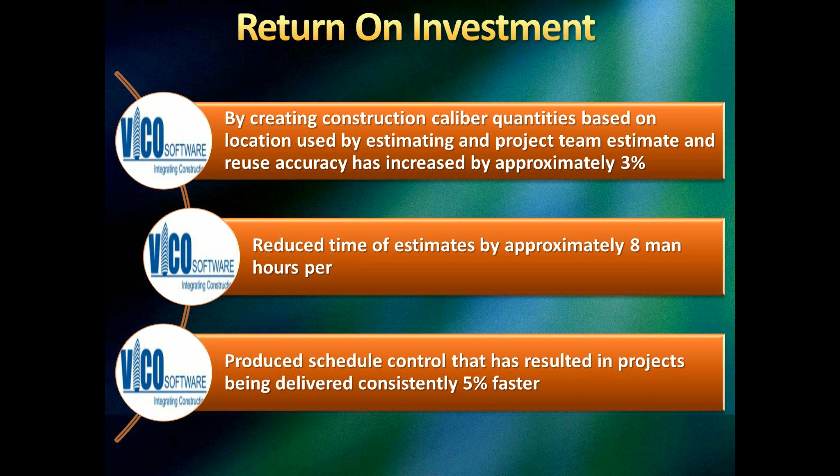Produce schedule control that has resulted in projects being delivered consistently 5% faster. And this is an unbelievable and astonishing rate for us, because of the ability to take that model into Vico and not only do cost planning control, but the ability to take that into a flow line or location-based management structure and understand the modules by their location, and really look at reuse and casting cycles. It's given us the ability to really vet out our schedule problems.

If we look at some of the other technologies we've shown you today, robotic total stations clearly has reduced our cost of layout by 50%. It's reduced the cost of our rework and tolerances, not only on this job, but corporate-wide by 80%. It saved the owner nearly $100,000 because of advanced coordination and planning problems that we were able to solve from 3D laser scanning working with the BIM models.

It's provided invaluable as-built and as-is at the time documentation. Everybody talks about as-built record drawings, but there is nothing more powerful than bringing up a 3D, real-world, real-time representation of what the world looked like on that particular day, that you can go in and measure and check tolerances and pull quantities from, and move that information into a BIM model or extract it for other representation or data collection capabilities. And that is an invaluable amount of information, and of course it obviously enhanced our change management on the project.

So with that, I'd like to really say thank you for taking the time to listen to what I had to say, and some of the advantages that we've seen by using Trimble technologies out on the LAX project and all of our projects. And with that, Holly, I guess I'll throw it back to you if anybody has any questions, and they're still awake.